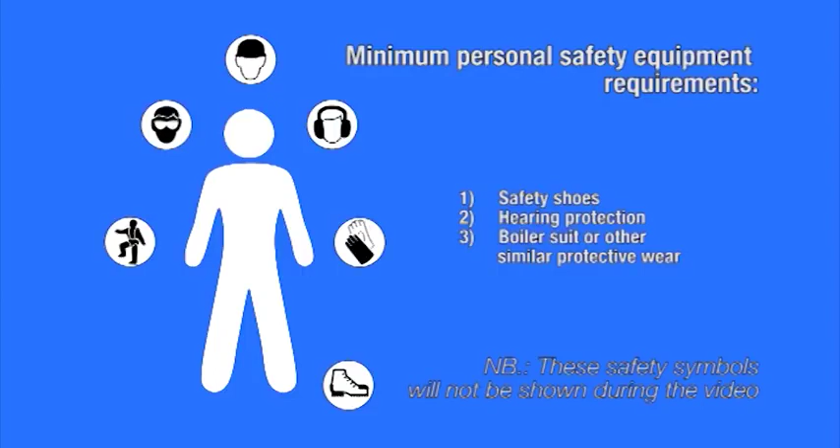This film shows how to use the tools which are available for the L28/32H type of engine.

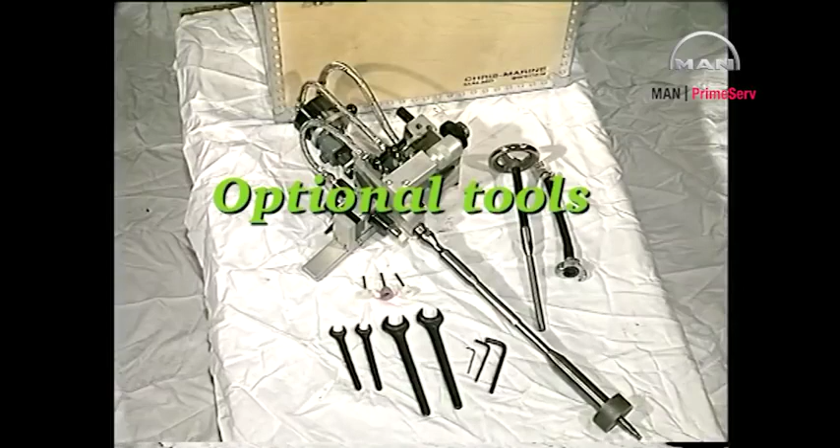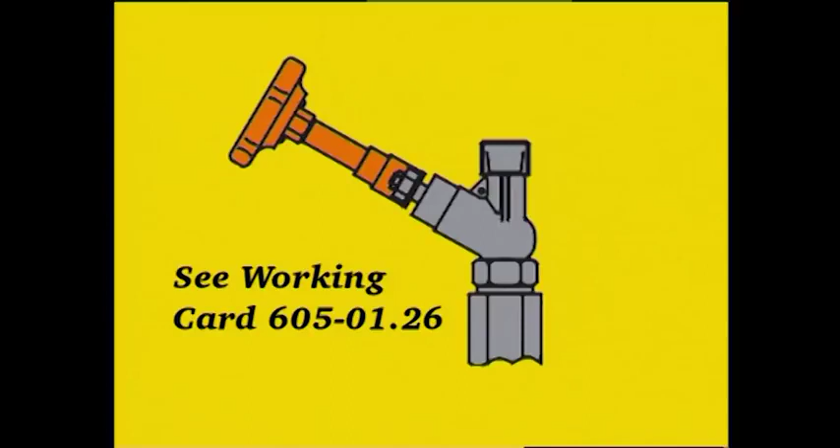Remove the scavenge air sleeve and the safety valve. For instructions regarding the overhauling of the safety valve, please see work card 605/01.25. The procedure for overhauling the indicator valve can be seen on work card 605/01.26.

Land the cylinder head on the work table. Make sure that the valve spindle supports have been mounted on the underside of the table. Remove the cylinder head lifting tool. Screw the cylinder head firmly to the work table.

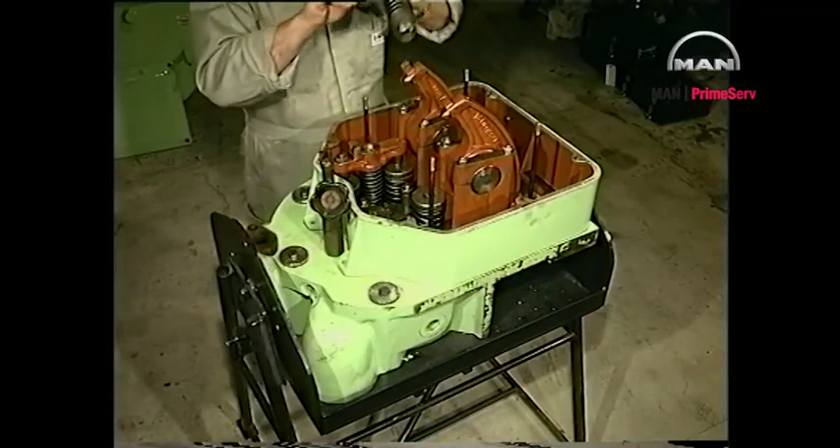Remove and discard the gasket. Remove the valve bridges and mount the tool for compressing the valve springs above either the two inlet valves or the two exhaust valves.

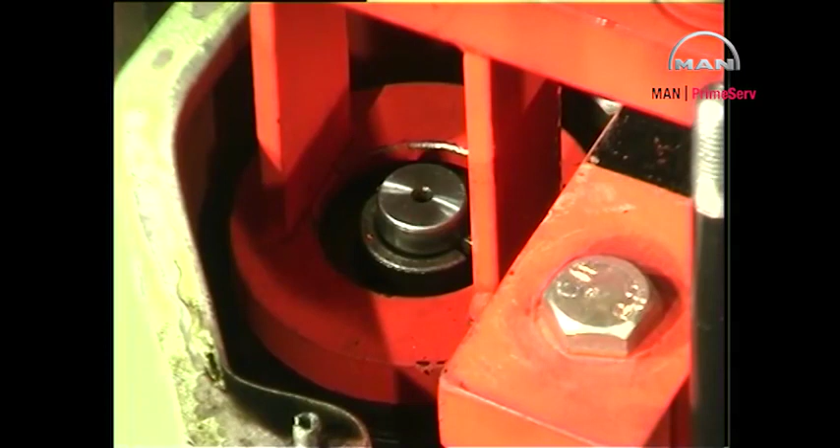Tighten the nut to compress the springs and then remove the cone rings. Loosen the nut and remove the compressing tool.

Remove the valve rotators and the springs. For instructions regarding the inspection and overhaul of the valve rotators, see work card 605/01.15. Remove the cone rings, valve rotators and springs from the other set of valve spindles in the same way.

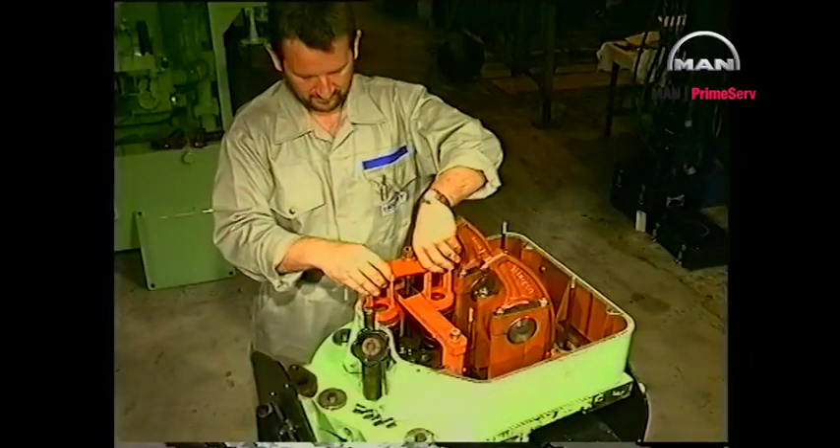Regarding the overhauling of the fuel valve, see work card 614/01.10.

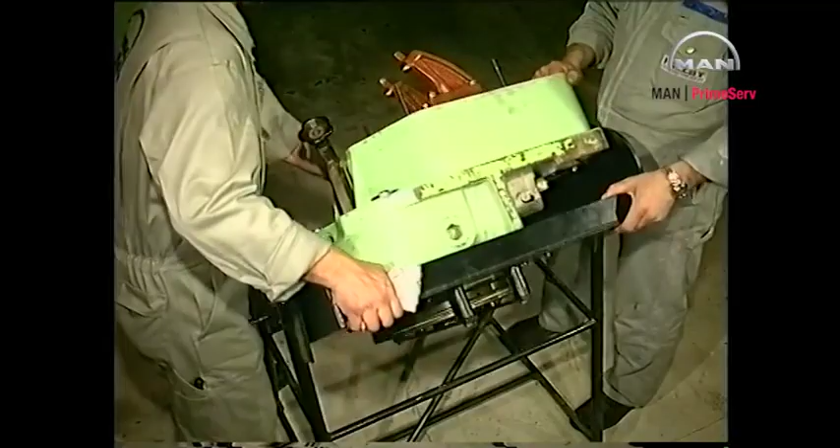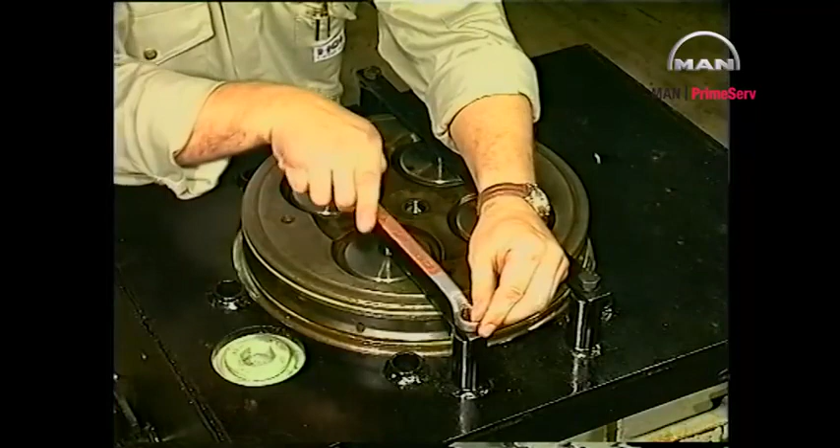Turn the cylinder head upside down and remove the valve spindle supports. To ensure that they can be rematched correctly, provide the spindles and cylinder head with numbers. Remove the valve spindles.

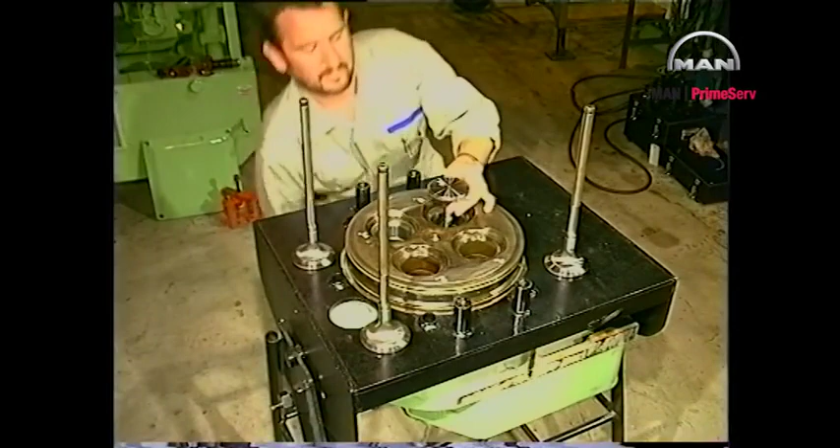Clean and check the condition of the valve seats and valve spindles. If the seats and spindles are badly burnt, recondition them. See working card 605-01.10.

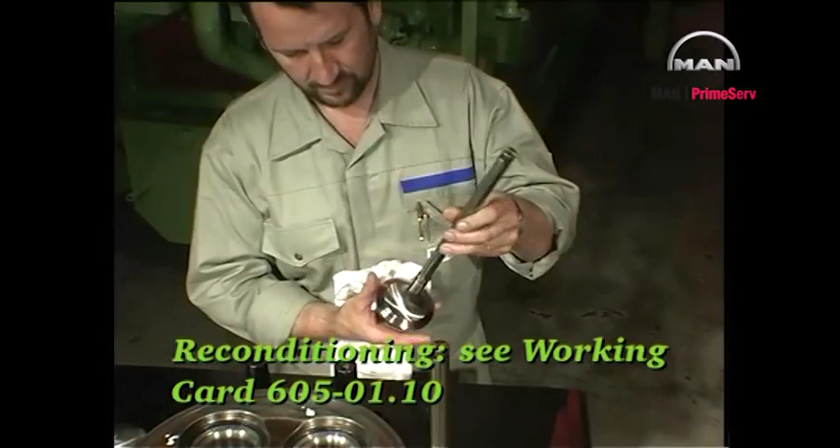Clean the valve guides with the special tool delivered with the grinding machine. Mount the grinding machine and grind the valve seats following the instructions of the grinding machine supplier.

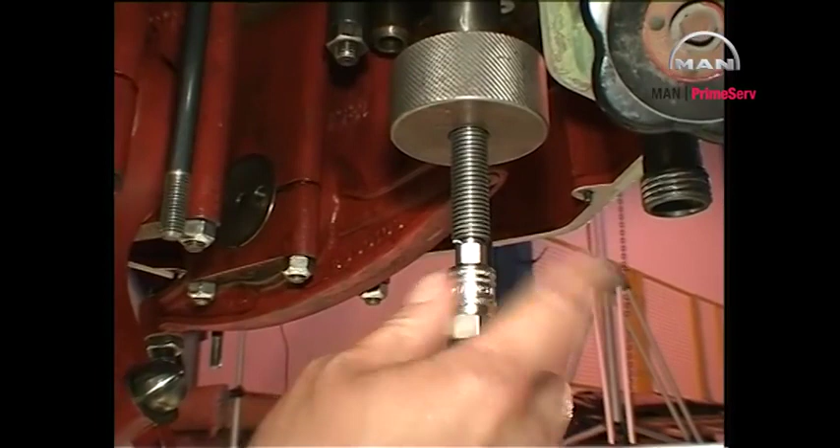Grind the valve spindles in a turning lathe following the instructions of the grinding machine supplier.

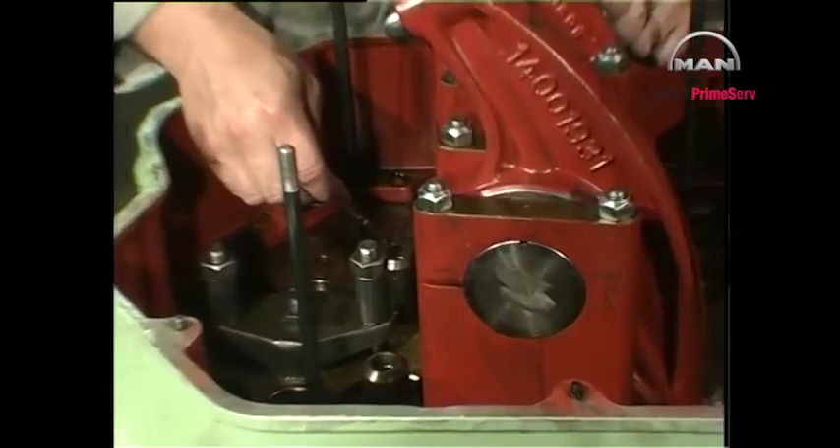Remove and discard the O-rings from the valve guides. To ensure the correct functioning of the valve guides, make sure that the diameters do not exceed the maximum limit.

Insert a valve spindle to facilitate the mounting of new O-rings. Insert new O-rings using another spindle to press the O-rings completely into the groove.

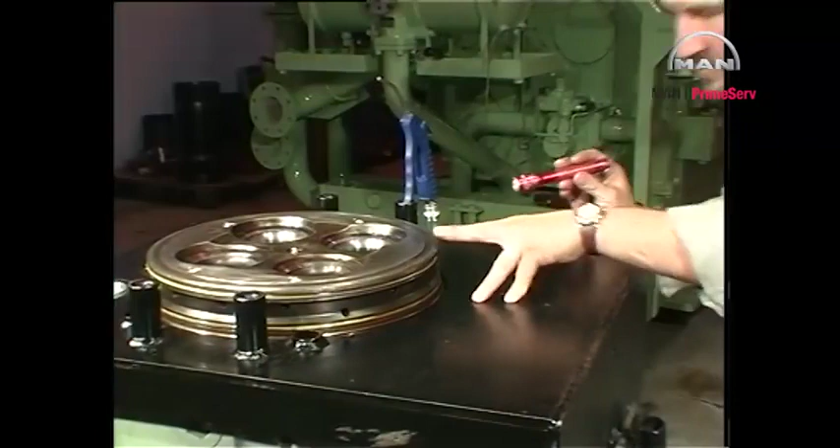Check the cooling water inlet bores and remove any deposits. Turn the cylinder head around and check the cooling water outlet.

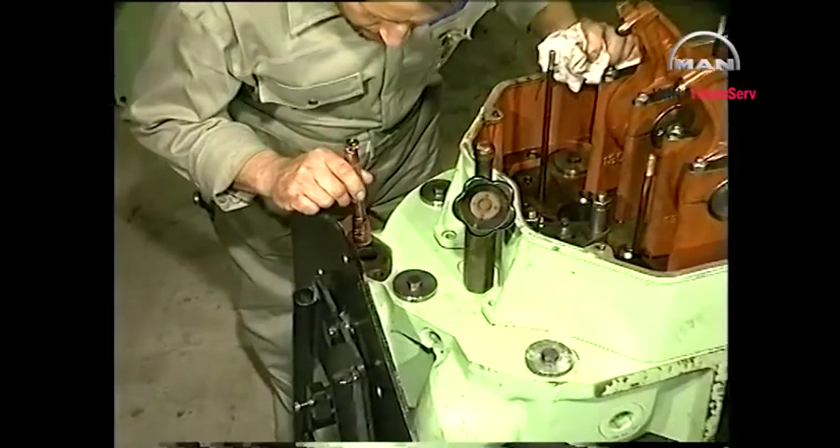Pour water into the cooling water outlet and ensure that water flows from all the inlet bores in the bottom of the cylinder head. If necessary, clean and flush the bores.

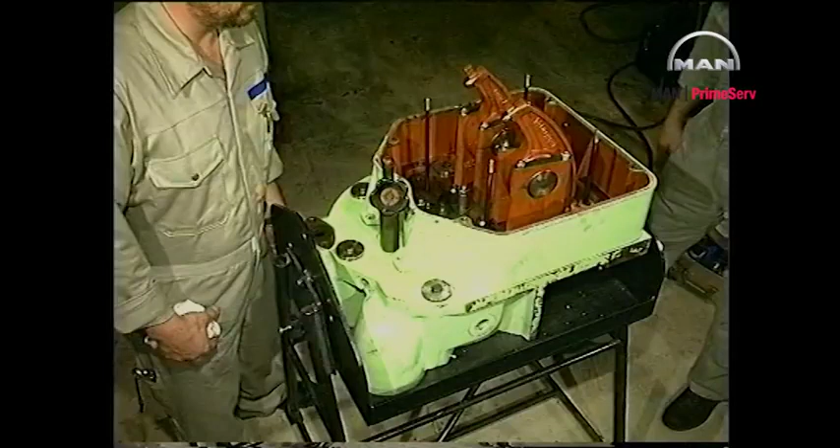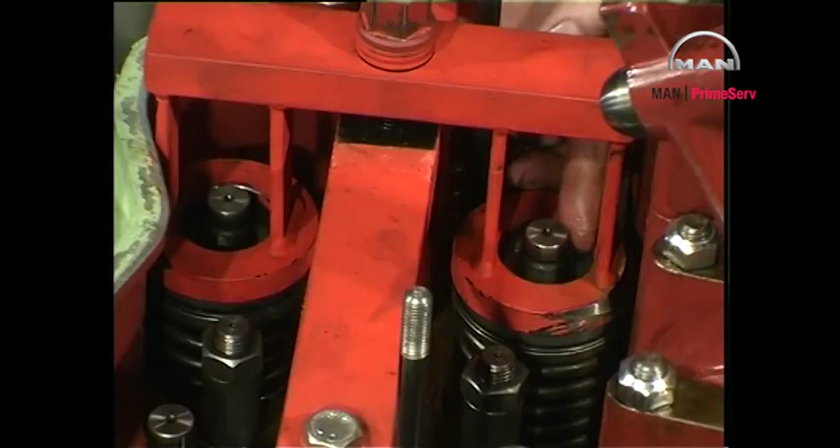Mount the inlet and exhaust valve spindles in the reverse order to the dismounting. Make sure that height H2 does not exceed the maximum limit.

Remove the valve spindle supports.

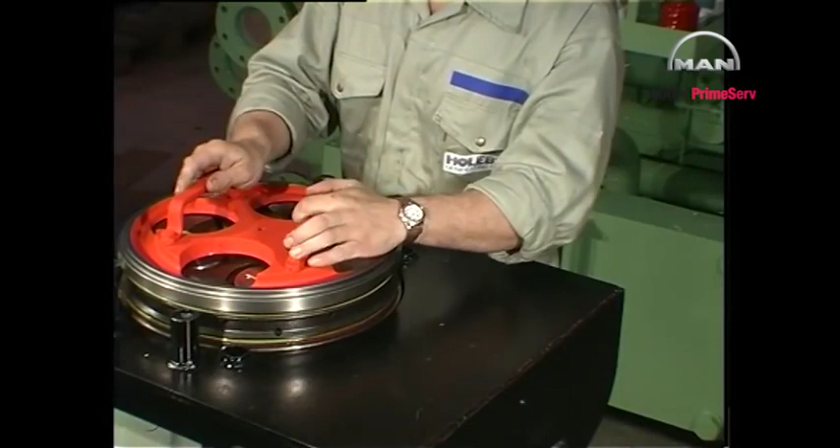Apply grinding paste to the sealing surface of the cylinder head. Move the grinding tool back and forth, lifting it from time to time so that the grinding compound is evenly distributed.

After grinding, carefully clean the cylinder head. Measure and record distance Z so that it can be used for reference purposes when remounting the cylinder head.

Mount the valve bridges and remove the securing screws.

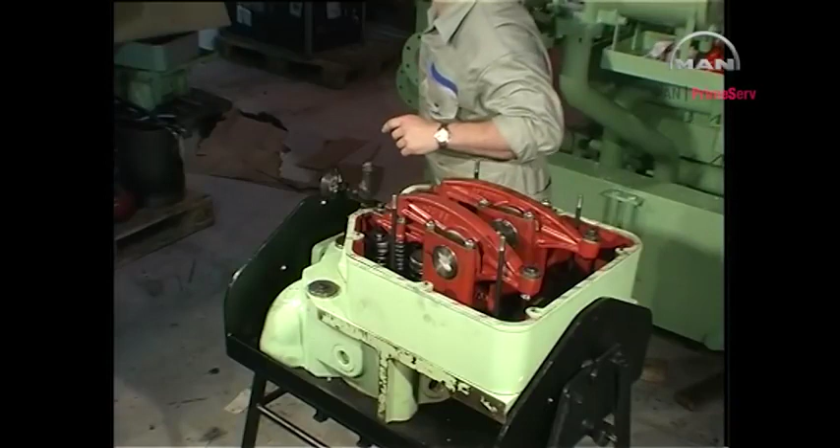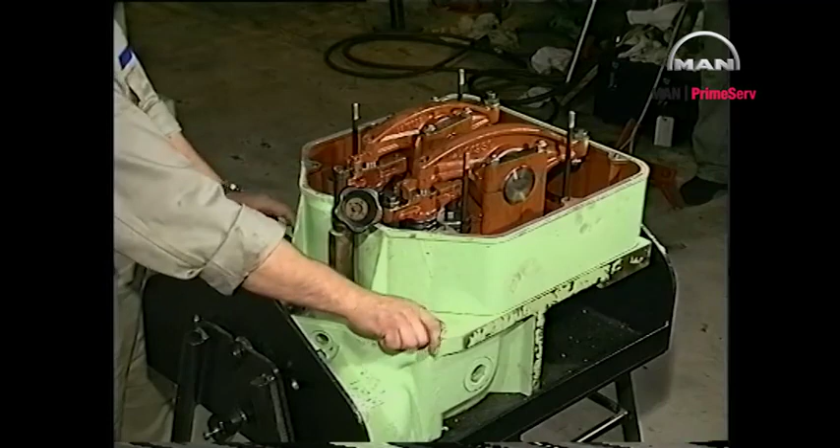Mount the cylinder head lifting tool and lift the cylinder head. Remove and discard the O-rings.

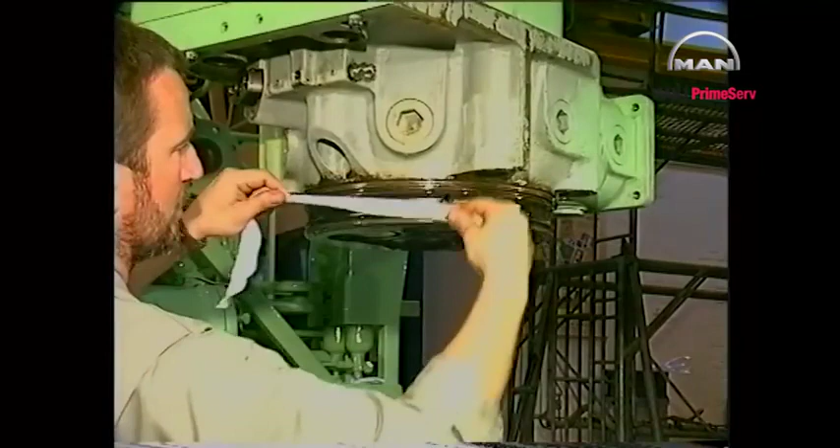Clean the O-ring grooves using emery cloth to remove any deposits. Make sure that the cylinder head sealing surfaces are clean and undamaged. Lubricate new O-rings with oil and mount them in the grooves.

Lubricate the safety valve with Molykote or a similar product and screw it into the cylinder head.

Remove and discard the piston rings and the scraper ring.

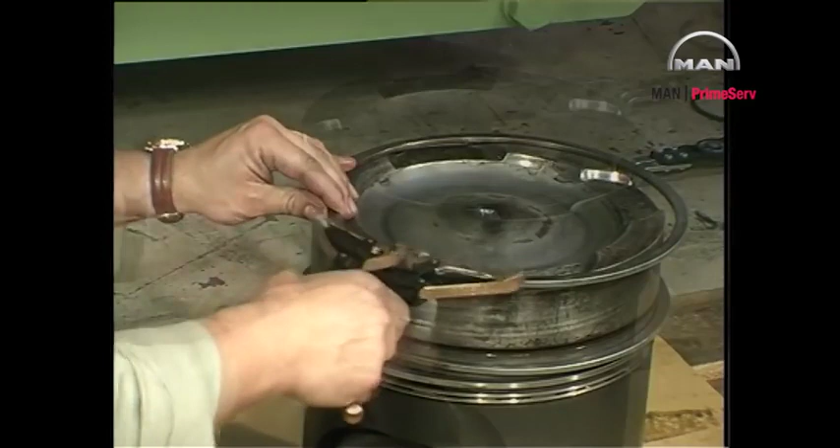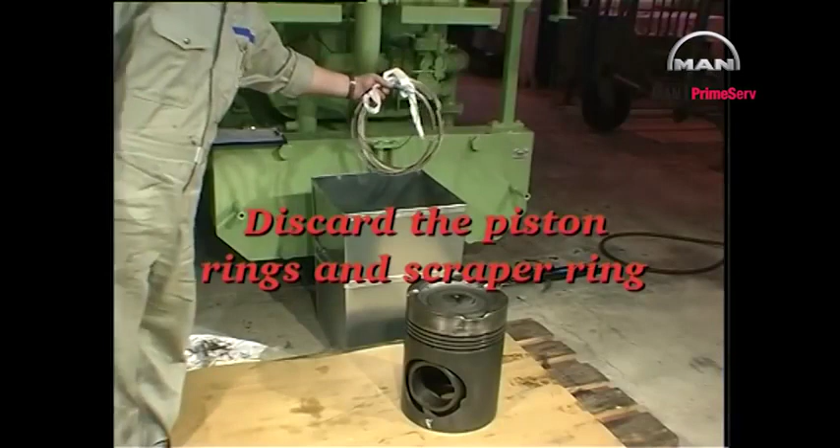Clean any deposits off the piston. It is recommended that a piece of old piston ring be used to clean the piston ring grooves.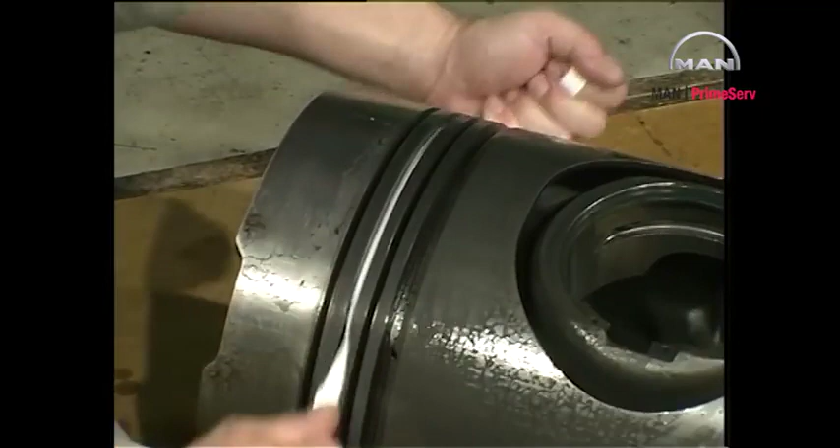Clean off any deposits from the inside of the piston. Check the piston ring grooves and scraper ring groove for wear.

The piston must be scrapped if the wear limit line on the testing mandrel is exceeded.

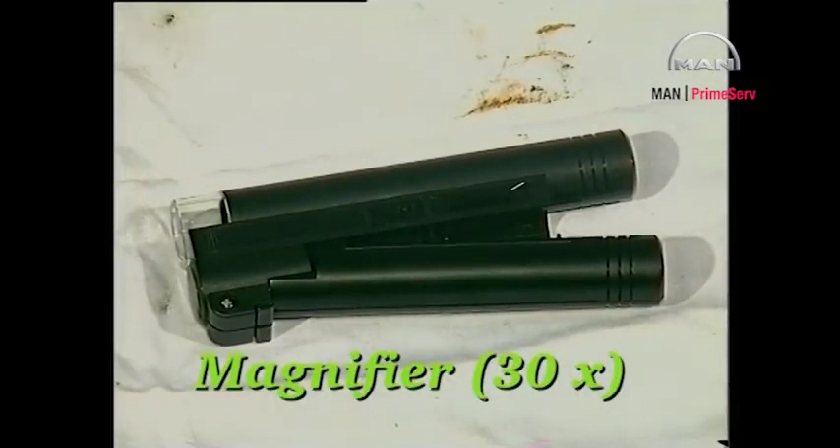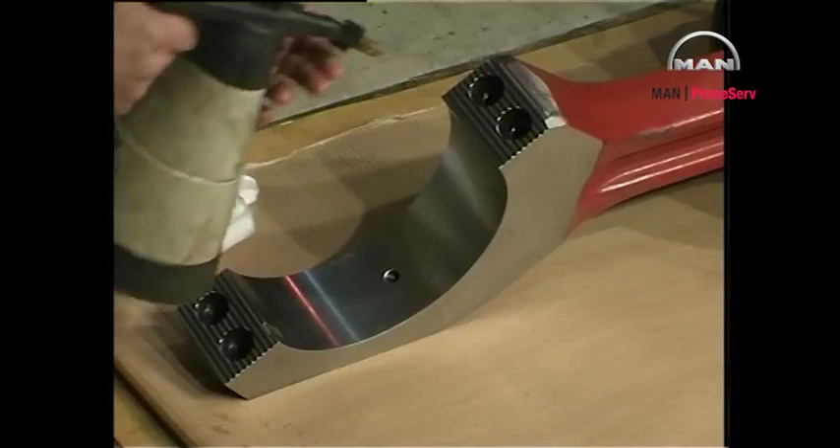Clean all machined surfaces of the connecting rod and bearing cap. Clean the serrated joint faces and threaded holes with a volatile solvent and then blow dry with compressed air.

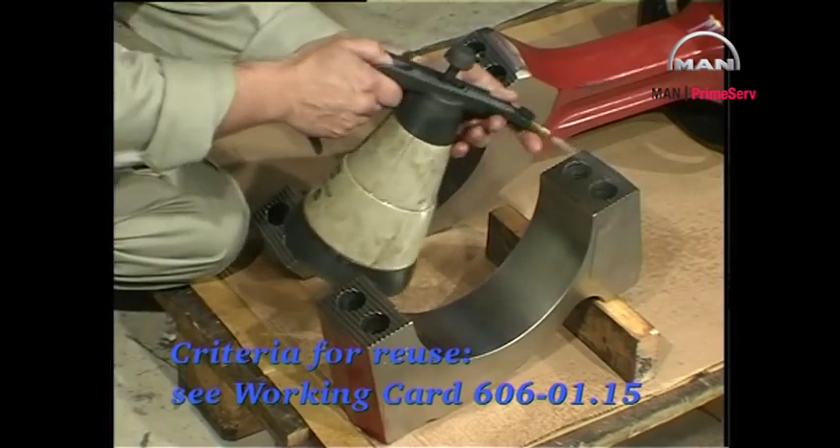Check the serrated joint faces for wear marks, pitting, cracks, etc. Refer to work card 606/01.15 for possible rectification and reuse criteria.

Enter observations in the connecting rod inspection report.

Clean the threads of the screws or the studs and check them for seizures. Lubricate the threads with Molykote or a similar product and check that the screws or the studs can be screwed fully home by hand. Take great care that the lubricant does not come into contact with the joint faces of the bearing. Also check for seizures or pitting on the contact surface of the screw heads.

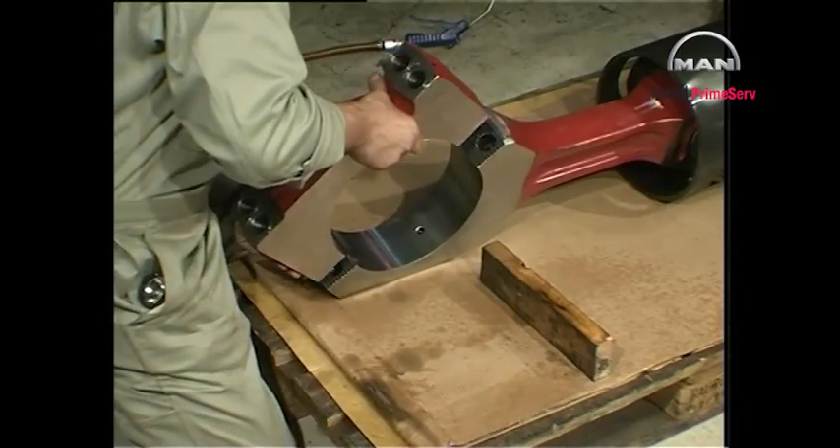Assemble the bearing without bearing shells. Make sure that the identification numbers on the connecting rod and those on the bearing cap are the same. Hand tighten the bearing assembly.

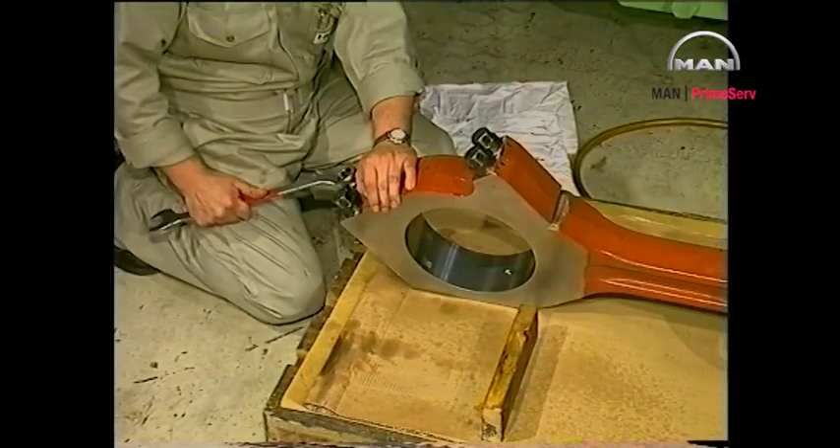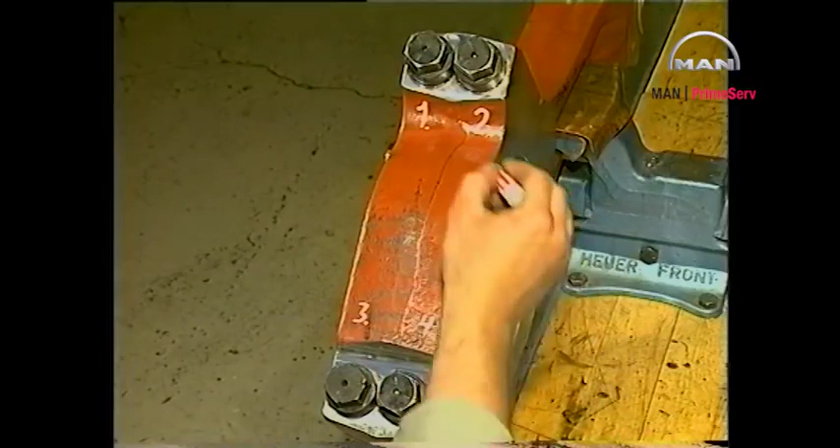The big end bearing must be tightened according to the prescribed tightening procedure before measuring the diameters. Adjust the torque spanner to 400 Newton meters. Using an initial torque of 400 Newton meters, tighten the screws in the tightening sequence shown.

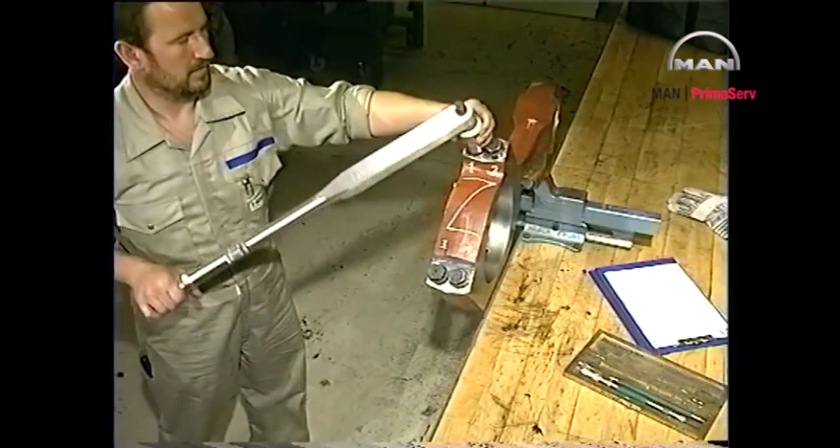Retighten the screws in the same tightening sequence, still using a torque of 400 Newton meters. Make marks on the 4 screws and the connecting rod with a felt-tipped pen.

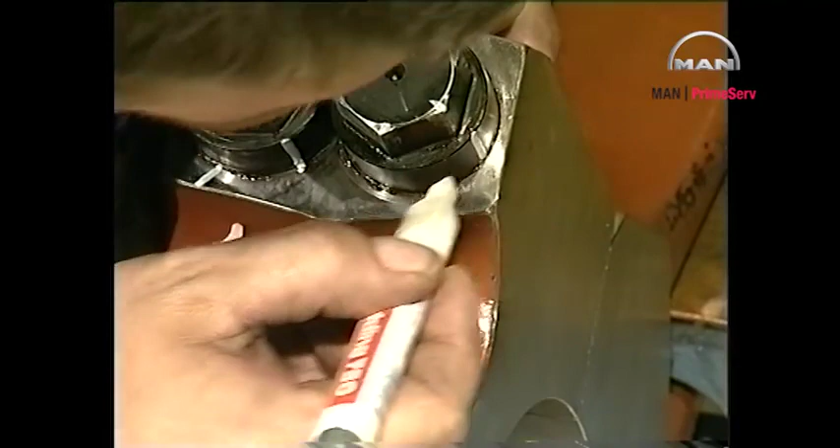Tighten the screws in the same tightening sequence through a 60-degree angle until the marks on the screws and those on the connecting rod coincide in the radial direction.

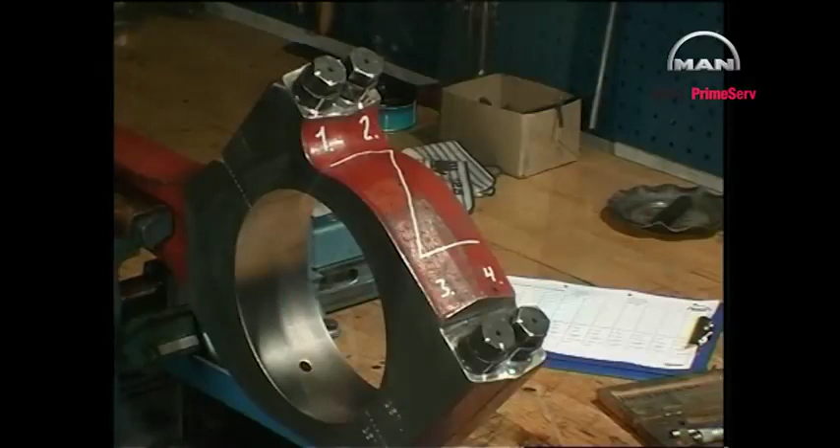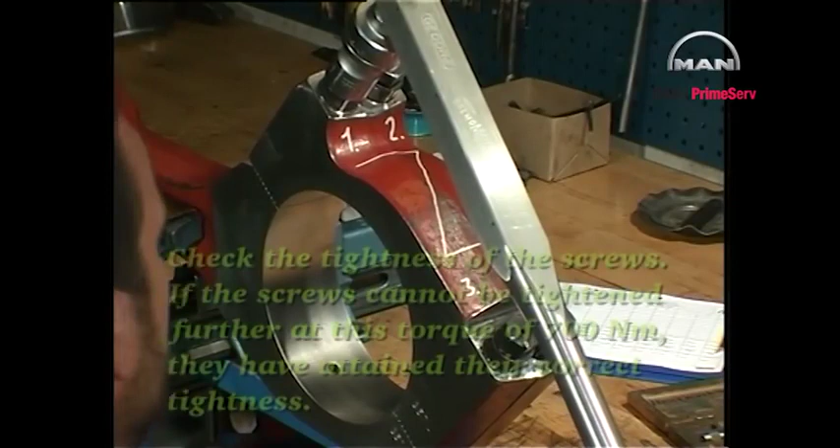Adjust the torque spanner to 700 Newton meters. Check the tightness of the screws. If the screws cannot be tightened further at this torque of 700 Newton meters, they have attained the correct tightness.

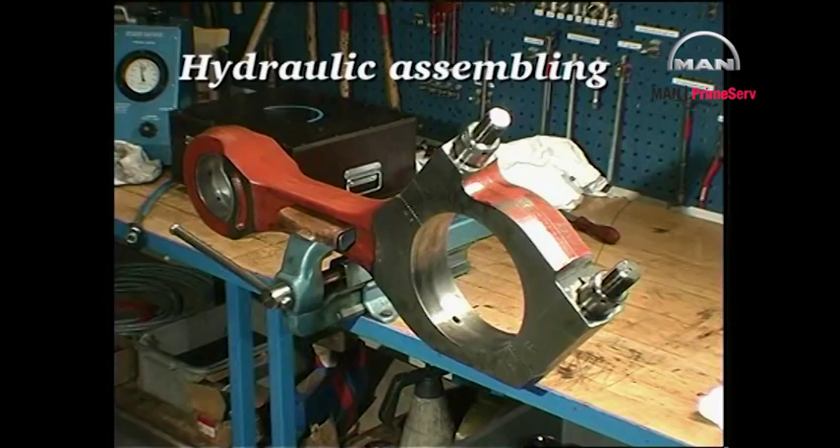The big end bearing must be tightened according to the prescribed tightening procedure before measuring the diameters. Clean all joint faces and mount the hydraulic tools. Make sure that all the parts engage correctly.

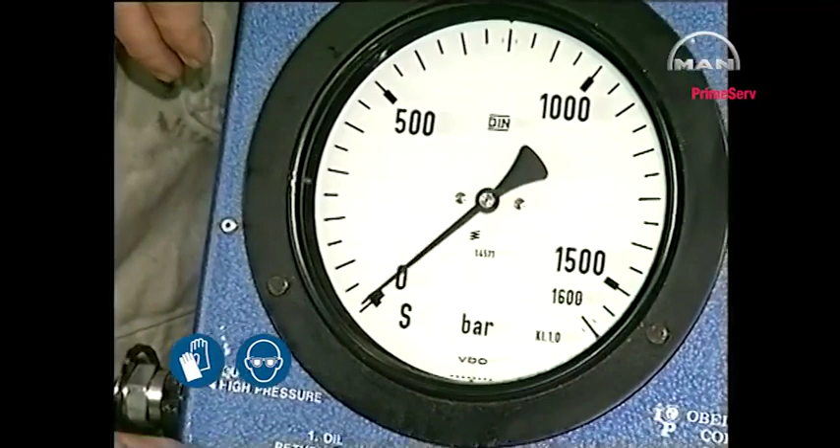Connect the hydraulic tools to the high pressure pump. Vent the system if necessary and increase the oil pressure to the prescribed value.

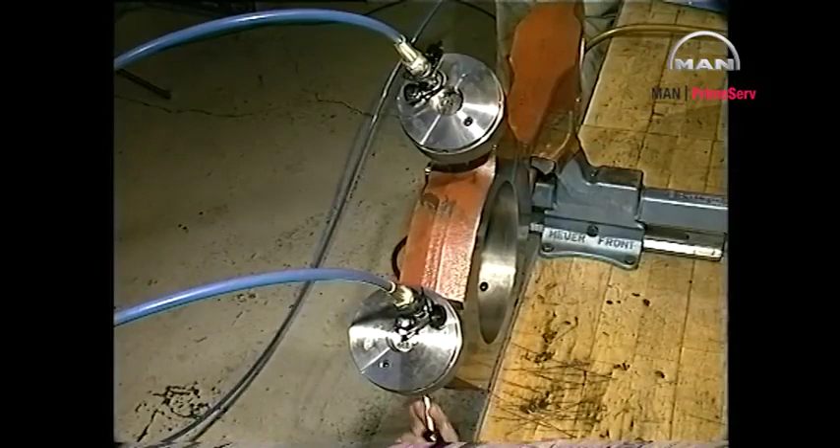Tighten the nuts with a tommy bar. Relieve the system of pressure and remove the hydraulic tools.

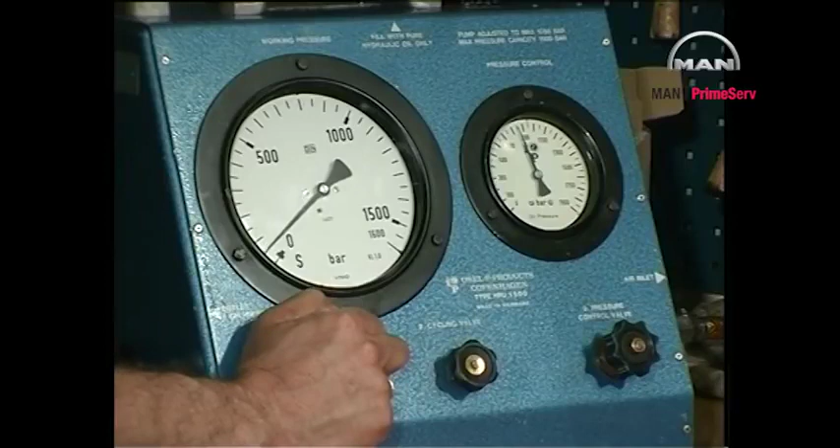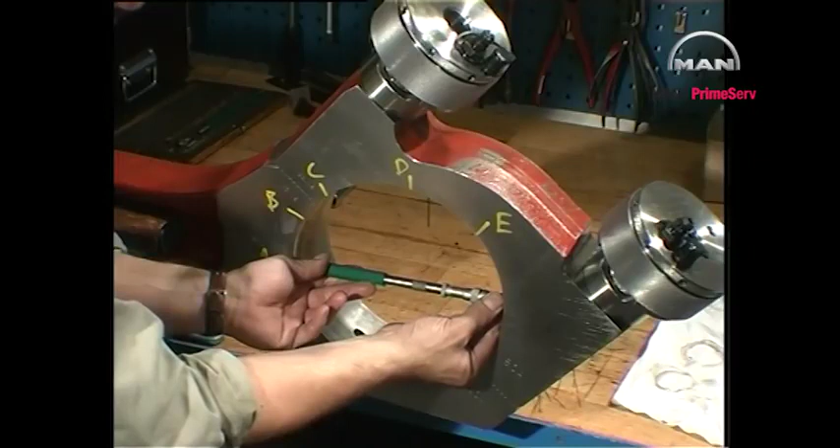Mark the 5 positions, A to E, at which the diameters of the bearing bore are to be measured. Measure the diameters in the middle of the bore and note down the result in the connecting rod inspection report. The maximum ovalness is defined as being the difference between the largest and smallest diameter measurement. Please refer to page 600.35 for maximum allowable ovalness values.

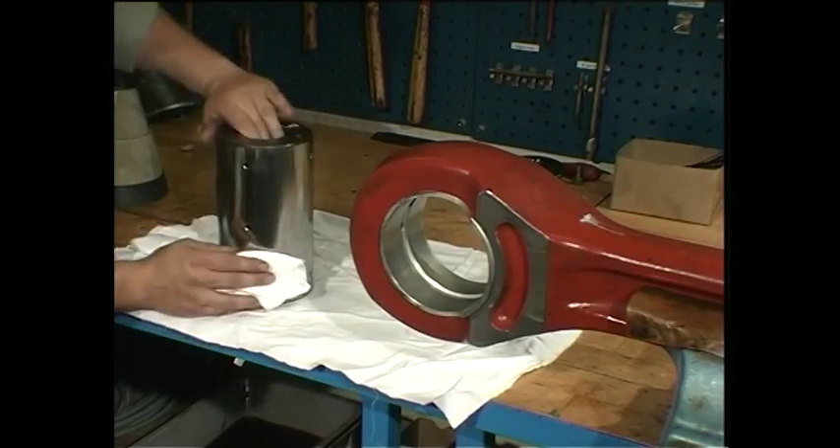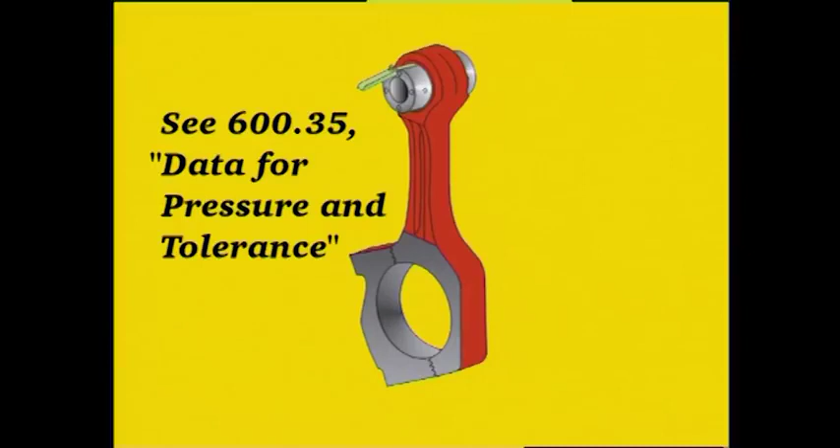Clean and inspect the surfaces of the piston pin and the connecting rod bushing. Insert the piston pin and measure the clearance between piston pin and connecting rod bushing. The maximum allowable clearance values are given in page 600.35.

Loosen the big end bearing assembly and then hand tighten it.

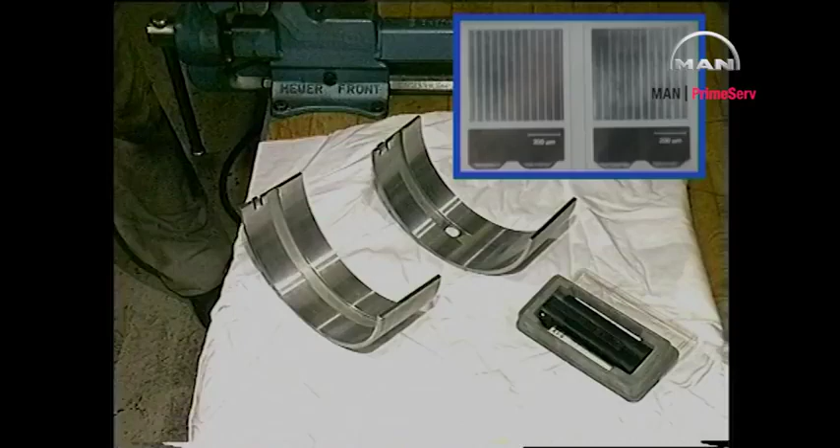Inspect the big end bearing shells through the magnifying tool. For help in evaluating bearing conditions, please refer to work card 606/01.16.

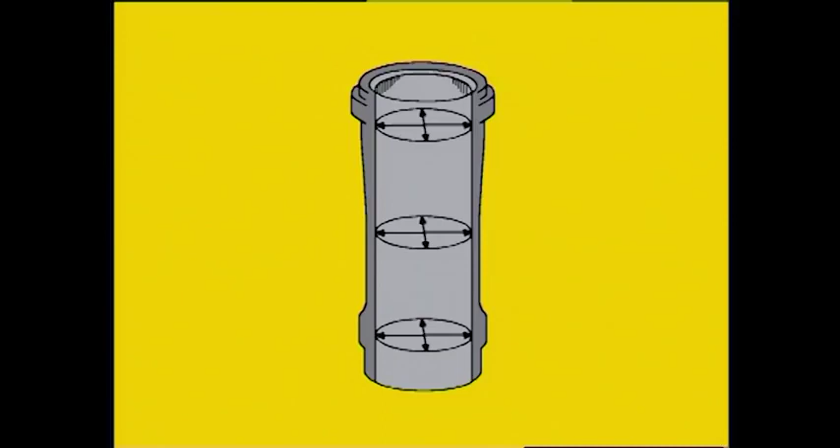Mark the positions in the longitudinal as well as in the transverse directions at which the diameters of the cylinder liner are to be measured. Make sure that the measuring tool has approximately the same temperature as the cylinder liner.

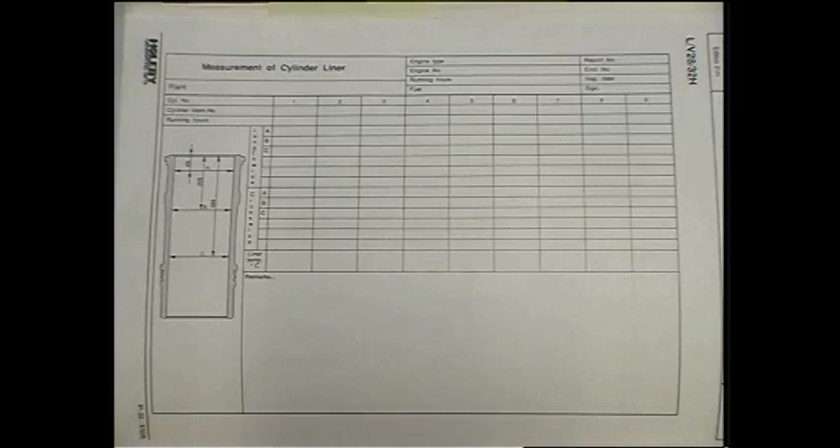Measure the diameters in the longitudinal as well as in the transverse directions and enter the results in the measurement of cylinder liner report. Please refer to page 600.35 for information regarding permissible cylinder liner wear values.

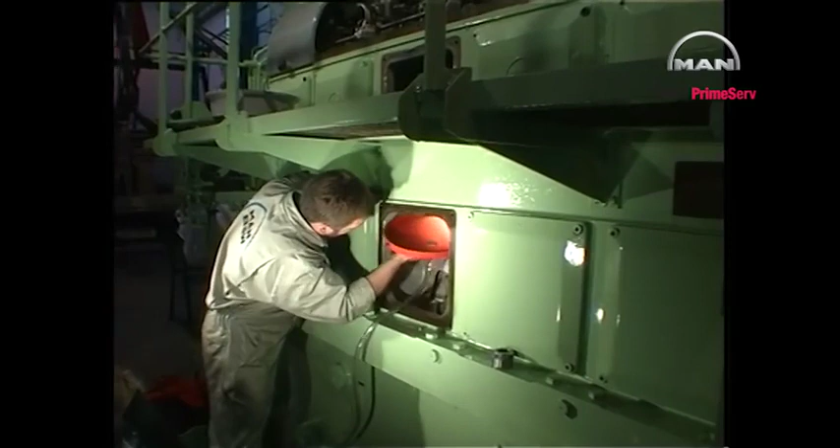If the liner is designed to hold a flame ring, clean and reinstall the used flame ring before honing the liner. Mount the tool for holding down the cylinder liner and remove any deposits or wear ridges from the upper part of the liner. Fit the drain funnel to the low end of the liner to prevent contamination of the crankcase during honing.

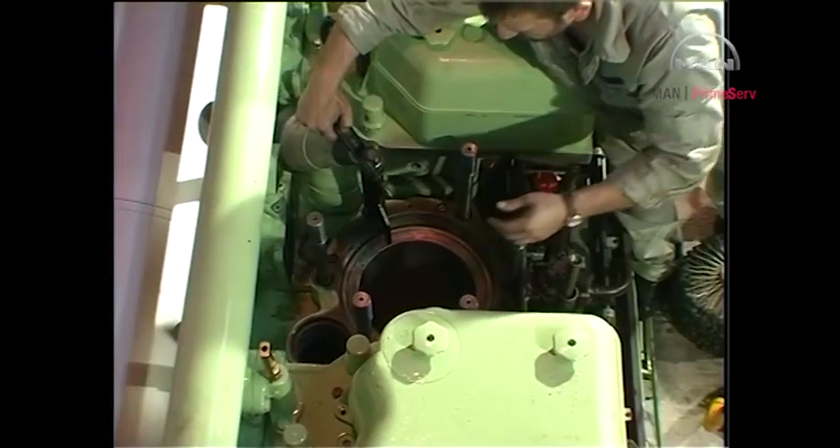Lubricate the honing tool and the liner with honing oil or cutting oil. Adjust the speed of rotation to 80 to 160 RPM. Use a vertical speed of about 1 meter per second to achieve the required angle between the honing grooves.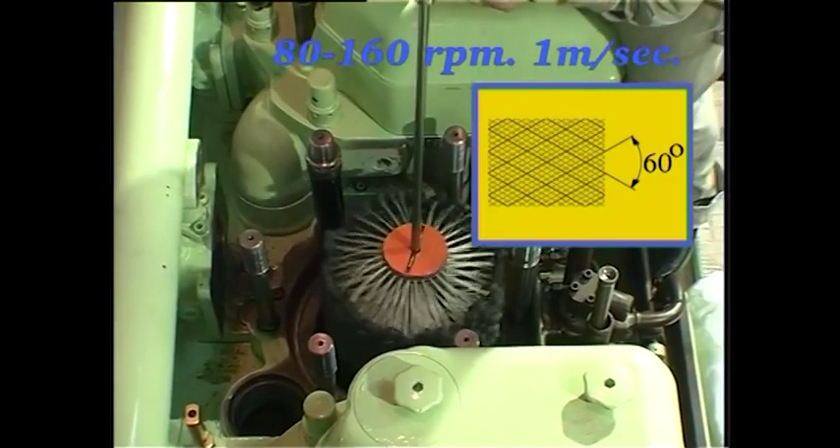Clean the cylinder liner carefully and remove the tool for holding down the cylinder liner. If the liner is designed to hold a flame ring, clean and install a new flame ring.

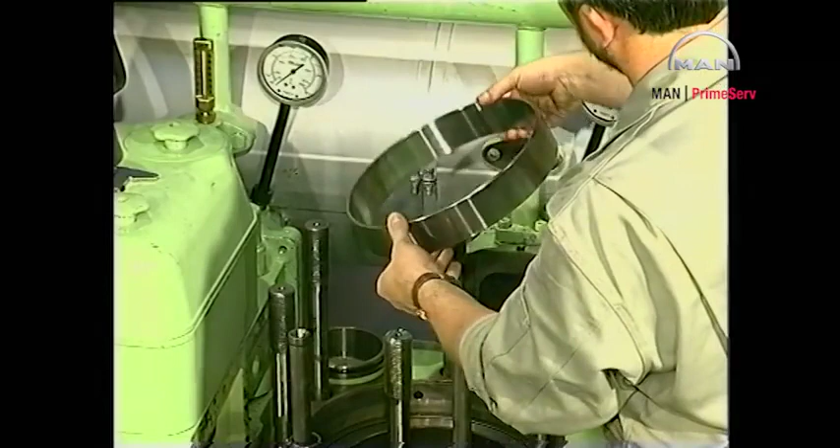Remove and discard the old sealing ring at the top of the cylinder liner. Apply grinding paste to the grinding tool. Move the grinding tool back and forth, lifting it from time to time to allow the even distribution of the grinding compound.

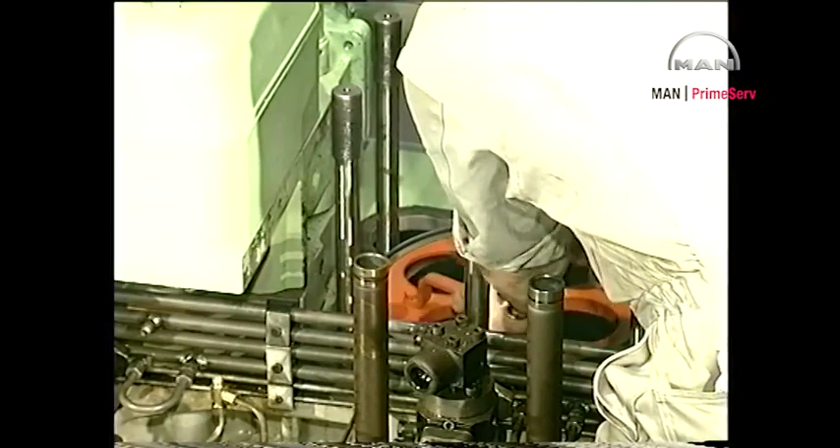After grinding, clean the cylinder liner carefully and mount a new sealing ring. Remove the drain funnel.

Measure and record distance Y. Please refer to measurement Z, which was recorded during the overhaul of the cylinder head. To ensure that the sealing between the cylinder head and the liner is correct, Y minus Z must be more than 0.5 mm.